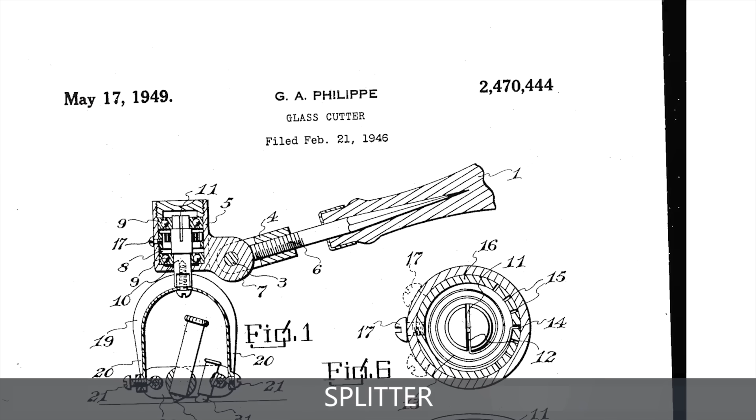What you came across is a specialized glass cutting tool known as a splitter, patented by George Philippe on May 17, 1949. This tool was designed for precision cutting of large glass sheets, commonly used in window fabrication.

Its most distinctive feature is a rotatable diamond cutter head mounted at one end. The tool is engineered to be used along a straight edge, allowing the diamond tip to score the glass in a controlled, continuous line. The handle is unusually long to provide better leverage and reach, enabling the user to apply steady pressure across the full length of the glass sheet.

The ability to tilt and rotate the cutter head means the user can adjust their hand position without losing contact with the guide, a crucial advantage when cutting larger panes or working on site.

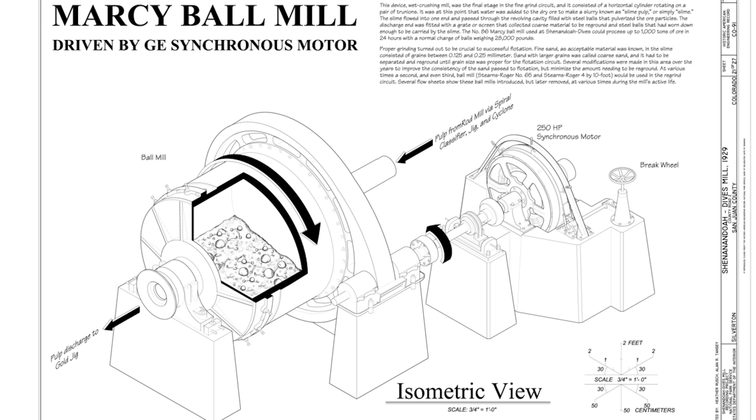What you found could be a worn-out grinding ball from a tumbling mill, a large rotating drum used in mining and industrial processing to crush materials like ore, rock, or cement.

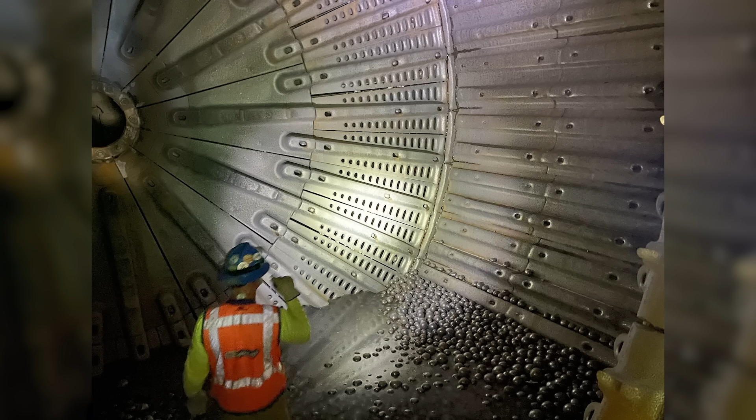These mills operate by rotating heavy steel or cast iron balls along with the material to be broken down. As the drum turns, the balls tumble and grind the material through impact and friction. Over time, these balls wear down from constant contact with hard materials. Originally spherical, they gradually lose their shape, becoming more geometric or flattened, frequently resembling unnatural-looking metal lumps.

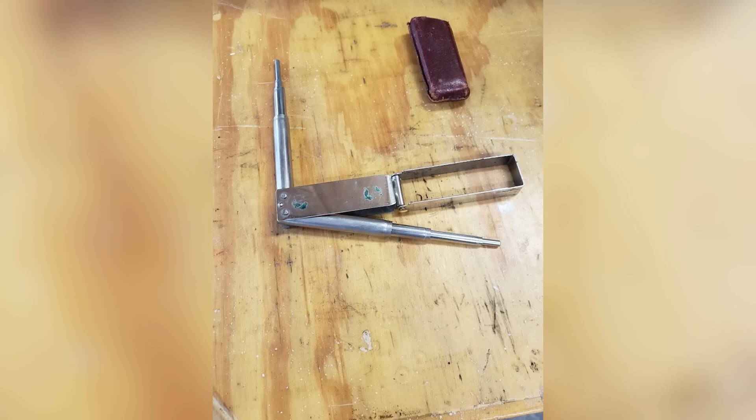While cleaning out an old tool closet, I came across a small metal tool that folds down to about 2 inches and comes in a red leather pouch. When unfolded, it has 2 telescoping rods that extend to around 17 inches. They're not spring-loaded and don't lock, but they stay extended. It was stored with regular hand tools like drills. Does anyone know what this might be?

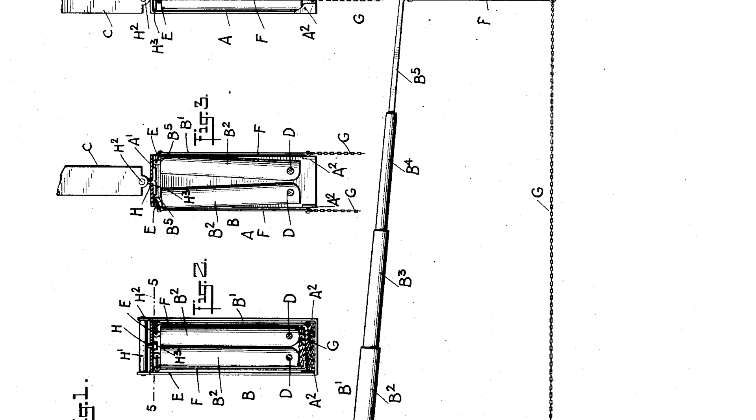This item is a vintage folding garment hanger, commonly referred to as a midget hanger. It was patented in 1912 by inventor Lozer Kalina as a portable solution for keeping clothing neat during travel. The compact design allowed it to fold down to just a few inches in length, making it easy to carry.

In a vest pocket or store inside a small pouch, like the red leather one you found it in. When extended, the hanger reveals 2 telescoping arms that support garments such as coats, vests, trousers, or skirts. While the rods don't lock into place, they stay extended through friction alone, which was sufficient for light to medium weight clothing. The center section typically included a hook or slot that allowed the hanger to be suspended from a rod or nail. These travel hangers were especially popular with businessmen, military personnel, and frequent travelers in the early to mid-20th century.

I came across a small cylindrical object that sort of unrolls or twists open, revealing a hollow tube on one end. It has Fairchild inscribed on it and measures about 2 to 3 inches long. There's also a thin slit running lengthwise down the body. Any idea what this might be?

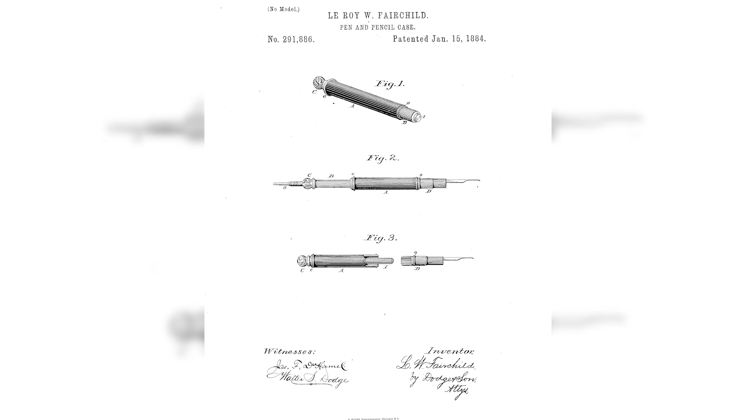What you found is a Victorian-era pencil pendant, manufactured by the Le Roy Fairchild Company, one of the most prominent makers of fine writing instruments in the 19th century. When twisted or compressed, the open slit would gently grip the graphite, allowing it to be used for writing or sketching. These pencil pendants were especially popular among women in the late 1800s and were commonly worn on chatelaines or as part of a necklace.

Le Roy Fairchild was a prolific inventor and craftsman, holding numerous patents for pencil mechanisms, ornamental designs, and pen holders. His company became a leading name in American writing tools. However, despite its earlier success, the Le Roy Fairchild Company eventually went bankrupt in 1905, making surviving examples like this one increasingly rare and collectible.

I found a wooden box that contains a removable metal sphere. When I shake the sphere, it makes a metallic rattling sound, like there are tiny balls or pieces inside. My dad discovered it in a relative's house after they passed. Any idea what this could be?

What you found is a type of alcohol hydrometer, a scientific instrument used to measure the strength and density of liquids, typically in the context of alcohol production. These were essential tools for distillers, brewers, and even tax officials who needed to calculate alcohol content for quality control and taxation purposes. The metal sphere you described is likely the weighted float of the hydrometer, and the small metallic balls you hear inside serve as internal weights that help stabilize or calibrate the instrument.

When placed in a liquid, the hydrometer floats, and the point at which the liquid meets the scale indicates the alcohol concentration or specific gravity.

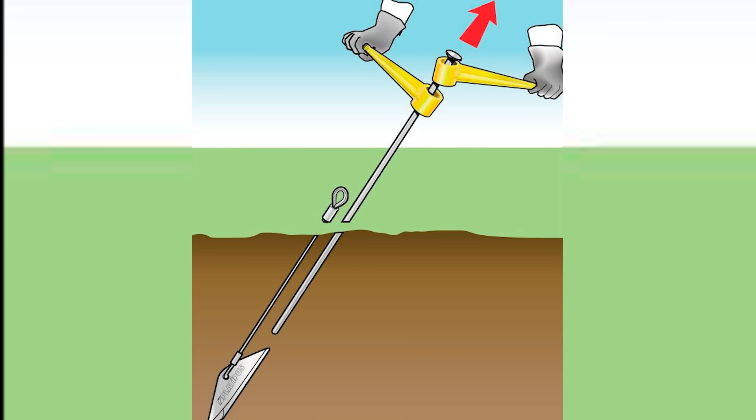These anchors are driven into the soil using a rod or drive tool that fits into the back end, opposite the pointed tip. Once in place, the anchor rotates and locks itself into the surrounding earth, creating a stable and reliable anchor point. The holes in the anchor are designed for threading steel cables or rods through, allowing it to hold tension once buried.

They're commonly used in utility work, construction, erosion control, and by outdoor enthusiasts for setting up slack lines or guy wires when no trees or fixed points are available.

The US 4-inch marking refers to the size of the anchor, and the L inside a diamond is likely a manufacturer's logo. These markings, along with the partially visible MIW, may point to a specific US military or industrial supplier, as these anchors are also used for temporary field installations.

During a bathroom remodel, I found some tiny glass tubes filled with liquid hidden under the vanity. They're about 2 inches long, very lightweight, and have colored ends. Does anyone know what these might be used for?

What you found are vintage perfume samples known as nibs, a patented form of fragrance packaging that was popular from the 1930s through the 1950s.

These small tubes, usually made of glass, were designed to let customers test a wide range of perfumes without purchasing full-size bottles. Each tube, around 2 inches long, was filled with a small amount of perfume and sealed at both ends.

To use it, one would simply snap off the tips and let the fragrance drip onto the finger or wrist. The colored ends helped identify the scent inside, making it easier to distinguish between different fragrances in a sampler set.

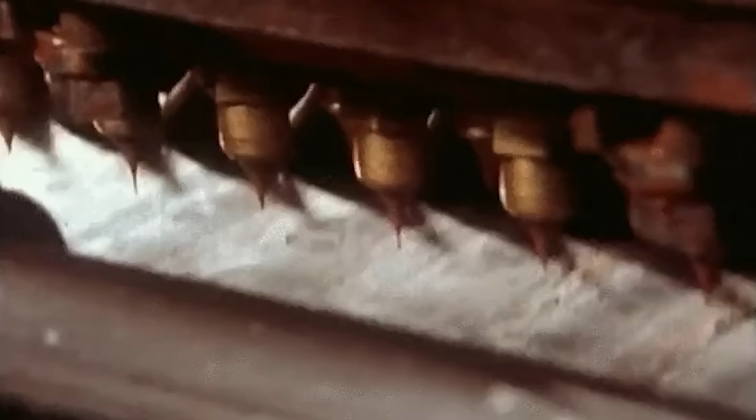In the last video, I showed you a strange item with wheels, a pointed metal rod, and a hollow tube with a wing bolt, and asked if you could guess what it was used for.

This tool is actually designed for removing weeds from narrow cracks and crevices, such as those between paving stones or along walkways. Now I want to invite you to identify another mysterious object.